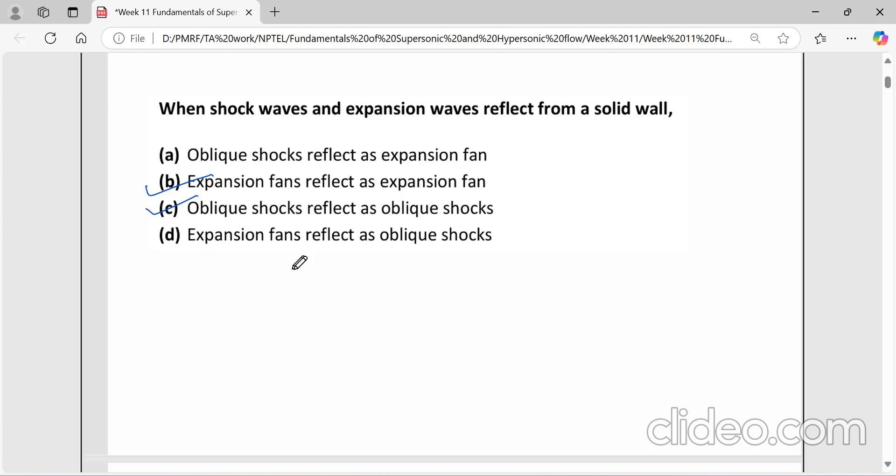So whenever there is one wall and one oblique shock is reflecting, then it will reflect as an oblique shock only. Its nature will remain the same. So whatever wave is reflected from the solid wall, its nature will remain the same.

And if an expansion fan is reflecting from a wall, it will remain an expansion fan only. So options B and C are correct.

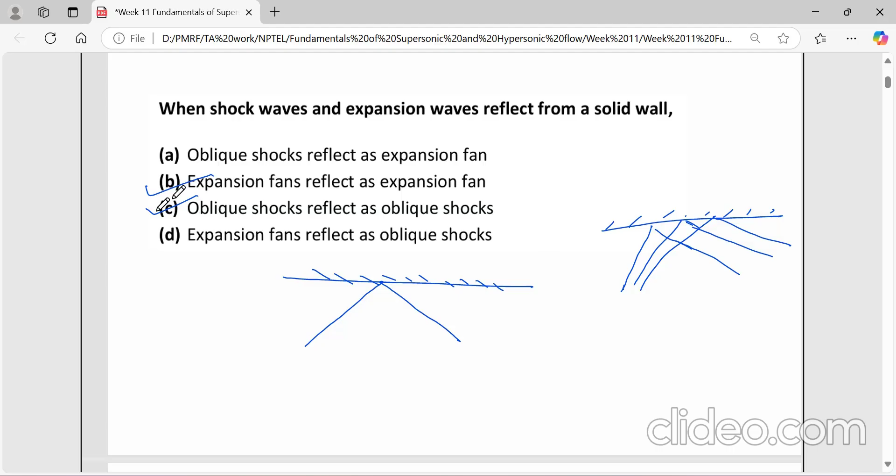Now we will see the next problem. The following statement or statements is or are true in connection with wave reflections from a constant pressure boundary. The previous problem was related to wave reflections from a solid boundary. This problem is related to wave reflections from pressure boundaries. Statement 1: A shock wave reflects as an expansion wave when it meets a constant pressure boundary. Statement 2: An expansion fan reflects as a shock wave when it meets a constant pressure boundary.

Option A, statement 1 true, statement 2 false. Option B, statement 1 false, statement 2 true. Option C, statement 1 true, statement 2 true. Option D, statement 1 false, statement 2 false.

So in this problem we have two statements and we have to tell which one is true and which one is false. In statement 1, a shock wave is reflecting from a constant pressure boundary, and in statement 2, an expansion fan is reflecting from the constant pressure boundary.

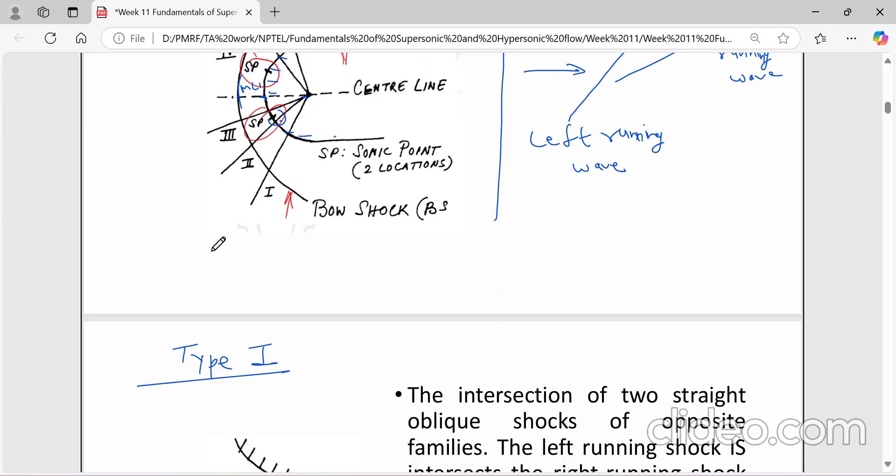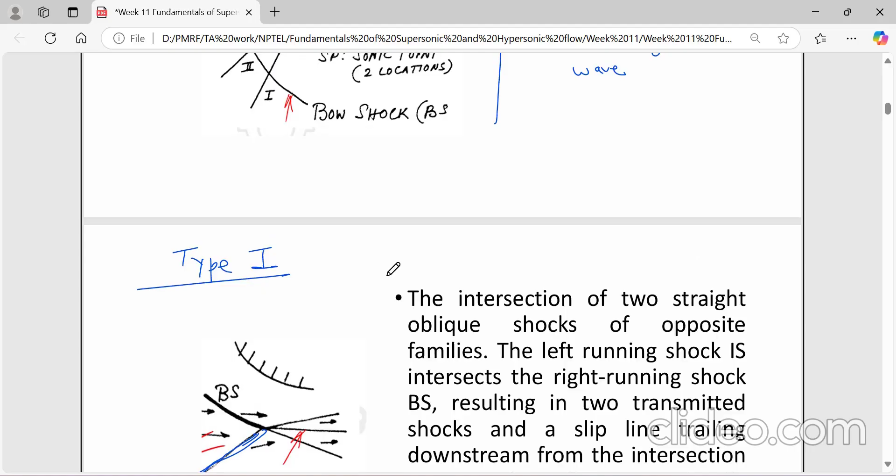If you see this region, this is almost like a right running wave. If an incident shock is interacting with it, it will be a left running wave. So the nature of type 1 interaction is the interaction of two straight oblique shocks which are of opposite family: one is left running wave and another is right running wave. I think this was asked in the question, but we'll first learn all other types, then discuss that problem. So it is an interaction between two straight oblique shocks of opposite family.

The left running shock is IS, the incident shock, and this BS is the bow shock. So this left running IS interacts with the right running BS, and due to this there will be two transmitted shocks, one here and one here, and this will be the slip line between these two. The flow will be supersonic everywhere because these are low strength shocks, so flow will be supersonic everywhere in this type 1 interaction.

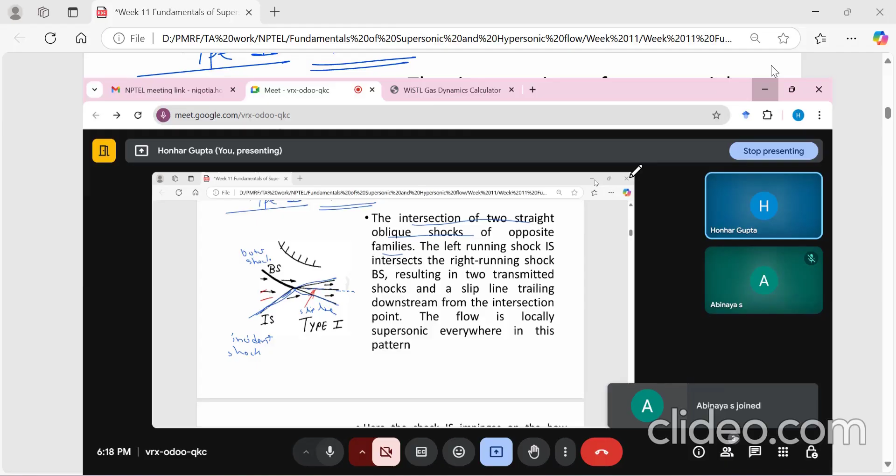Now we will see type 2 interaction.

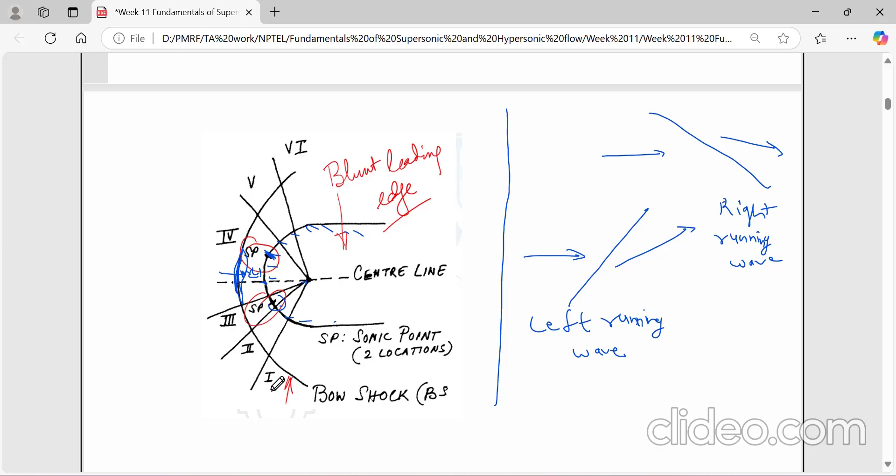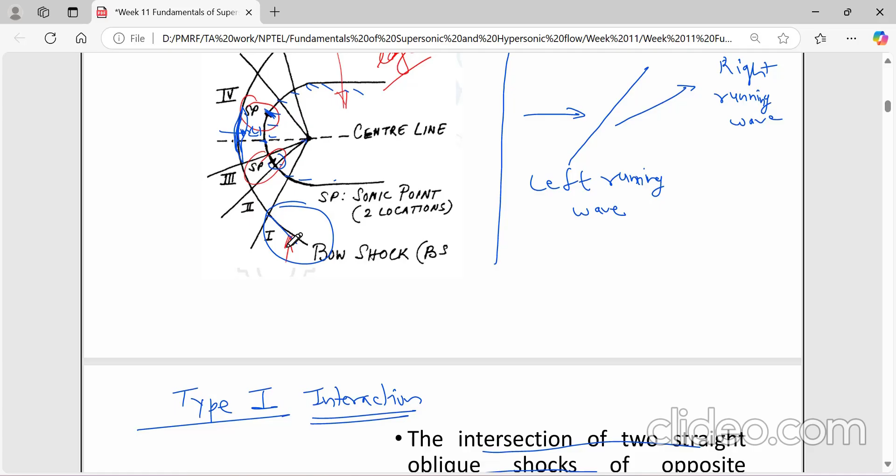Type 1 interaction is the interaction between the right running bow shock and left running incident shock. In this region, the bow shock is right running, almost a straight line with a right running. If there is an incident shock that is left running, both will interact, and the transmitted shock — two shocks will be transmitted — and there will be one slip line. As the strength of this bow shock is very low away from the stagnation point, the flow will be supersonic everywhere. This is the type 1 interaction.

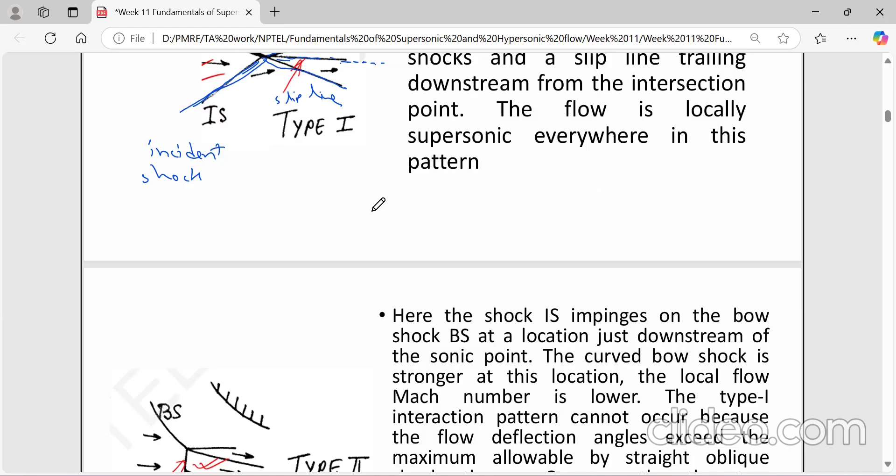Now we will see the type 2 interaction. One thing to note is that in the type 1 interaction, this right turning wave angle was also very small. But in this type 2 interaction, this right turning wave angle is not small, it is bigger, so this bow shock is not almost a straight line, it will be slightly curved.

And this angle is crossing the theta max value for the oblique shock, for which the shock will be a straight line.

So whenever the incident shock impinges on this bow shock, this impingement location is just downstream of the sonic point, just downstream of the sonic point.

This curved bow shock is stronger at this location, and the local flow Mach number is lower. The flow Mach number will be lower, but it will be greater than 1 only. So there will be...

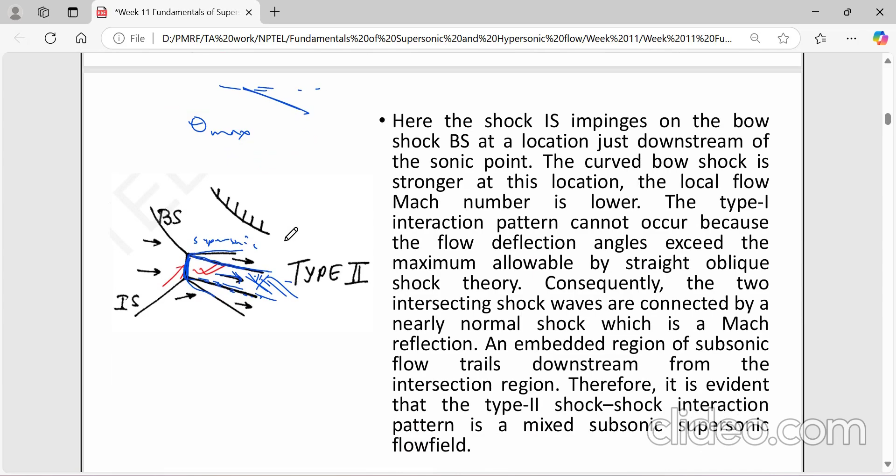So what will happen is that across the bow shock, the flow will be subsonic.

One thing—when these two shocks interact, there will be two transmitted shocks. So the flow behind the bow shock will be subsonic because it is upstream of the sonic point, but the flow behind this transmitted shock will be supersonic.

So this slip line—the flow behind the bow shock is locally subsonic. The flow behind the bow shock is locally subsonic, and the slip line trails downstream from the interaction point and its impingement on the body. The slip line will impinge on the body.

And the slip line separates the locally subsonic flow above it from the locally supersonic flow behind it. So this is the subsonic flow and this is the supersonic flow. The slip line separates them, and after it there will be some complex flow patterns. This is the type 3 interaction.

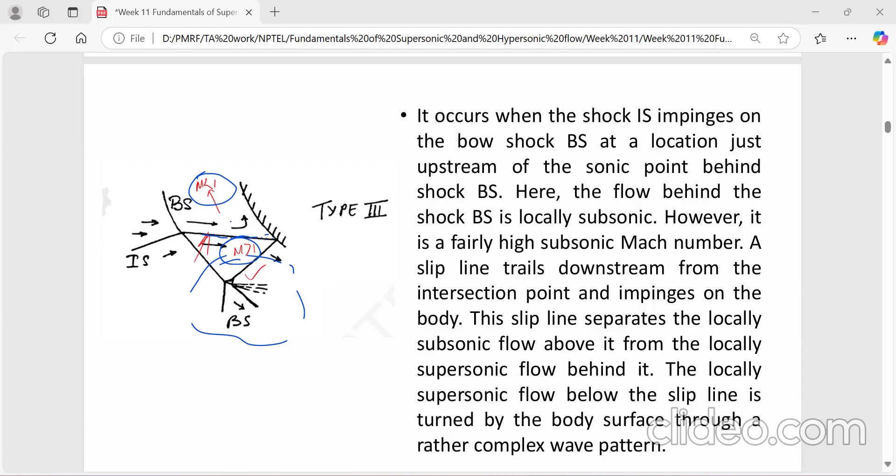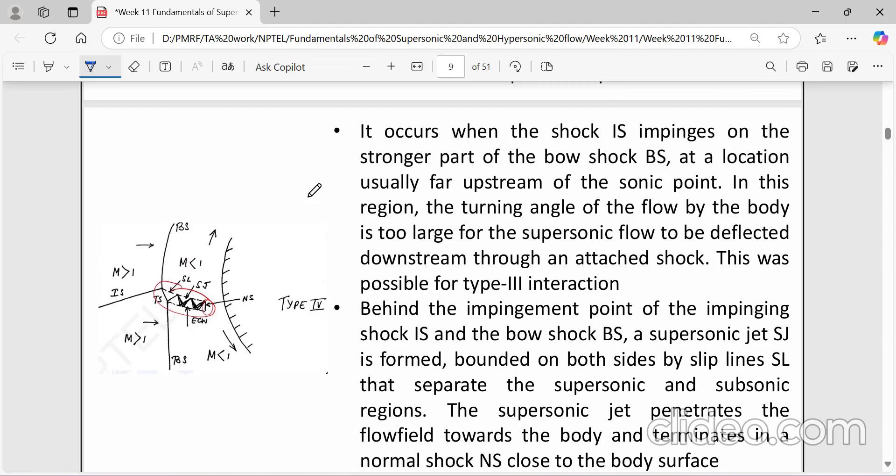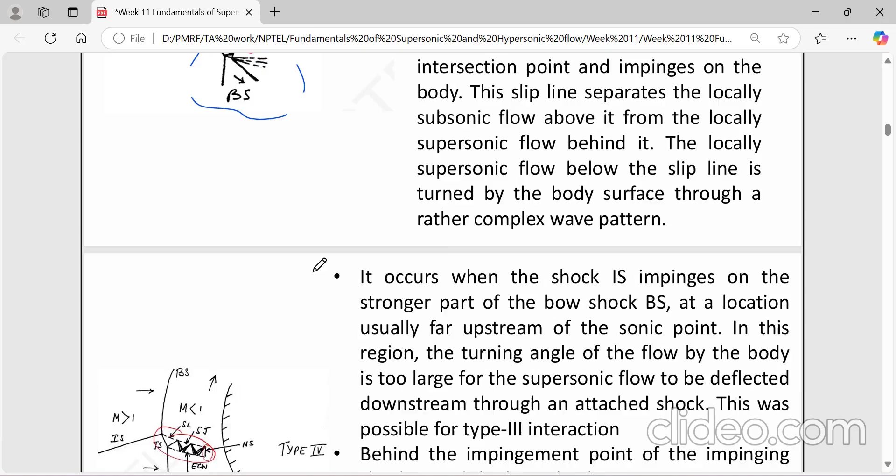Now we will see the type 4 interaction. It occurs when the incident shock impinges on the stronger part of the bow shock, at a location usually far upstream of the sonic point—here, in this region where the bow shock is strong, far upstream of the sonic point.

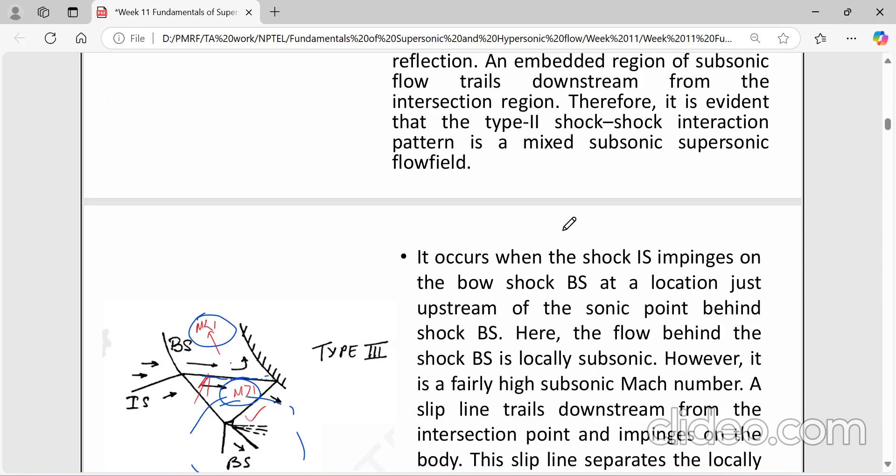And in this region, the turning angle of the flow by the body is too large. This turning angle is too large. If the flow is coming like this, then this turning angle is very large.

For the supersonic flow to be deflected downstream through the attached shock—this was possible for the type 3 interaction.

Behind the impingement point of the impinging shock IS and the bow shock BS, a supersonic jet SJ is formed.

These are bounded by two slip lines. This is a supersonic jet, and these are bounded by two slip lines, and there is...

You can say the series of shock waves and expansion fans are here, and it will go and impinge on the body, and it will terminate by the normal shock close to the body surface.

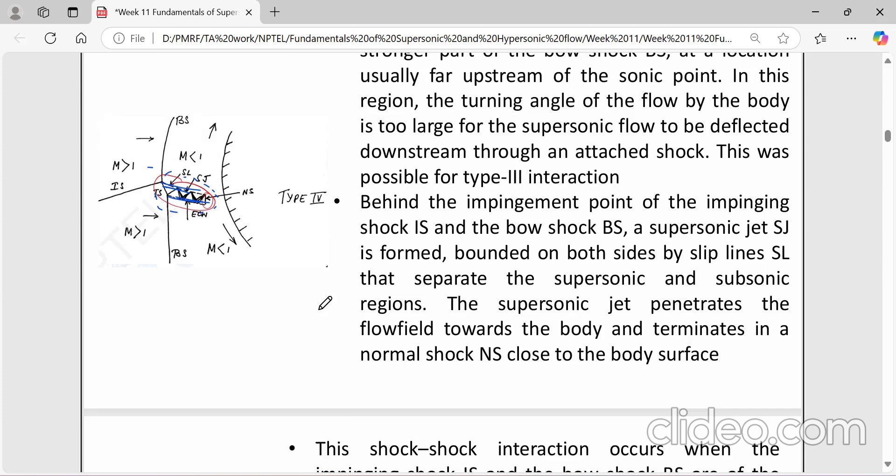And due to this, the pressure will be high, and the heating will be higher than in the case without impingement. And it will also be unsteady in nature.

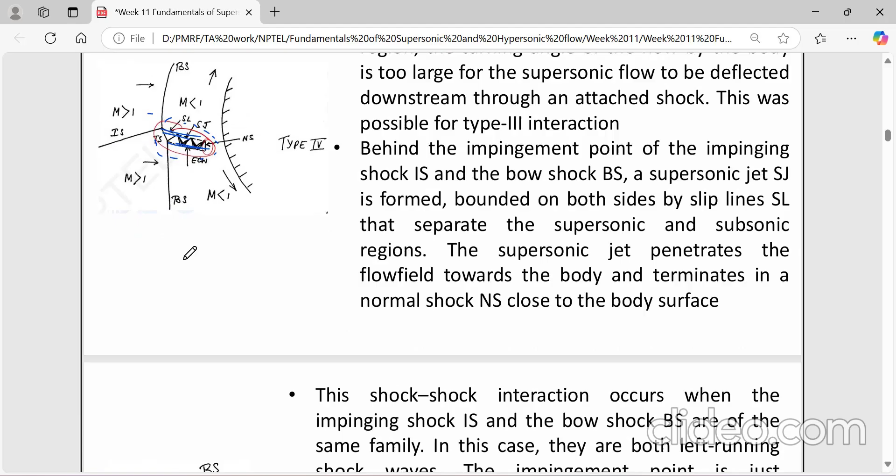Now we will see the type 5 interaction.

So this shock interaction occurs when the impinging shock and bow shock are of the same family.

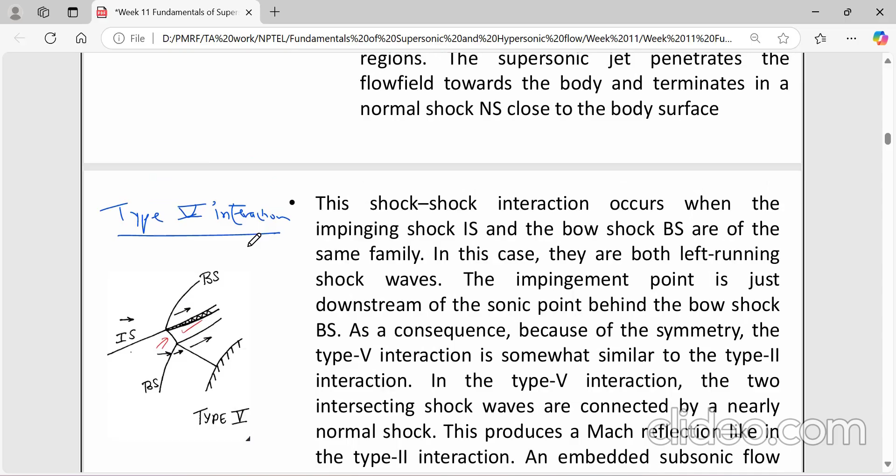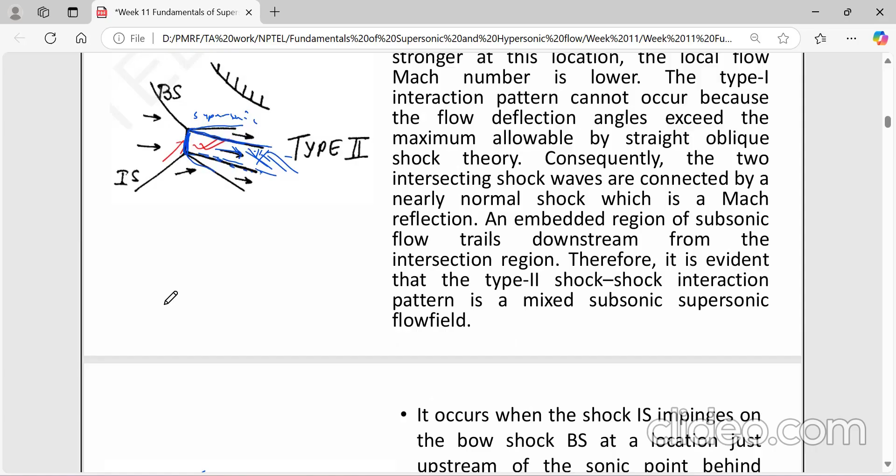If you see the type 5 interaction, it is somewhat similar to type 2, with only a slight difference. In type 2, both the bow and impinging shocks are of different nature, left running and right running. But in type 5, both are left running.

So there will be one Mach reflection, and there will be subsonic flow between the two slip lines. The impinging point is just downstream of the sonic point behind the bow shock, similar to the case of type 2 interaction.

In the type 5 interaction, the two intersecting shock waves are connected by a nearly normal shock. This produces a Mach reflection like type 2 interaction, and an embedded subsonic flow region forms downstream from the intersection region.

So this embedded subsonic region is formed. Both are bounded by one slip line, and on one side there is a very thin supersonic jet, which acts more like a slip line since it is so thin. So this is a type 5 interaction.

Type 6 interaction is also similar to type 1 interaction. This is the type 6 interaction. The only difference is that this interaction involves two left running shock waves, and the impingement point is far downstream from the sonic point. Here you can see this region - it is far downstream from the sonic point.

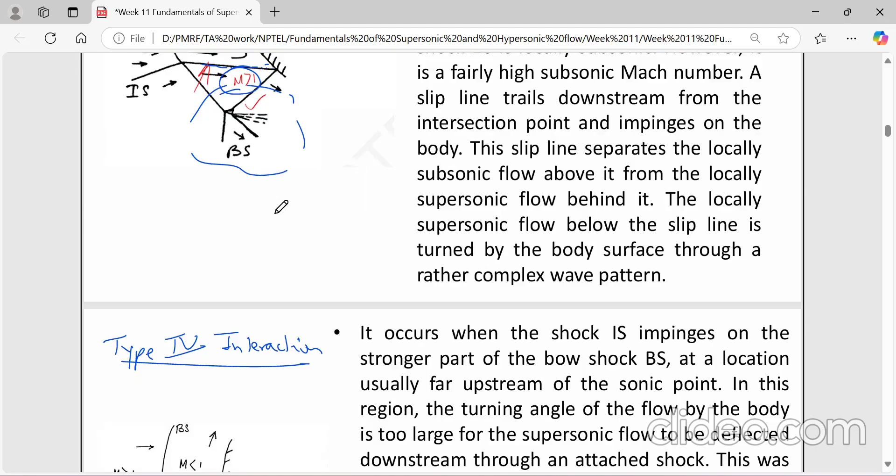This interaction is analogous to type 1 interaction, which I already told you. Here two shock waves of the same family intersect at a point, coalescing into a single transmitted shock and a slip line trailing downstream from the intersecting point, as you can see here.

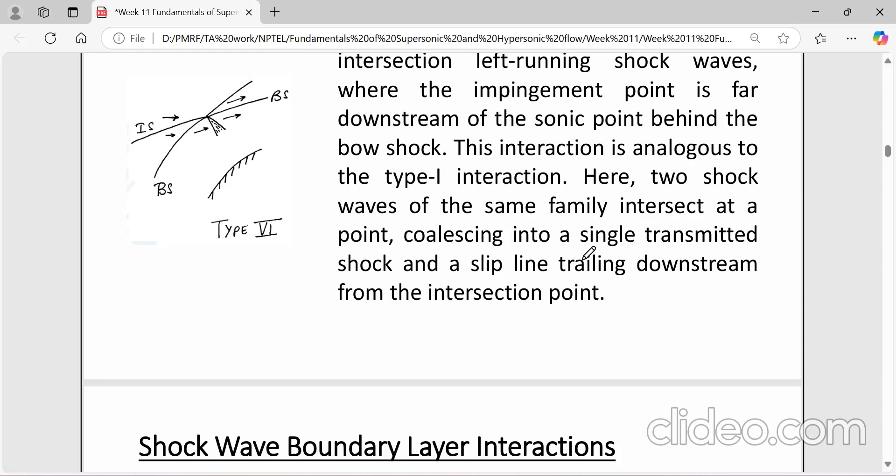So now we have seen all 6 types of interaction. So we will now see the problem which we were discussing before.

Statement 1 was: type 1 interaction involves two shocks of the same family. Is this true or false? It will be false, because the incident shock is left running and the bow shock is right running, so both are of opposite family.

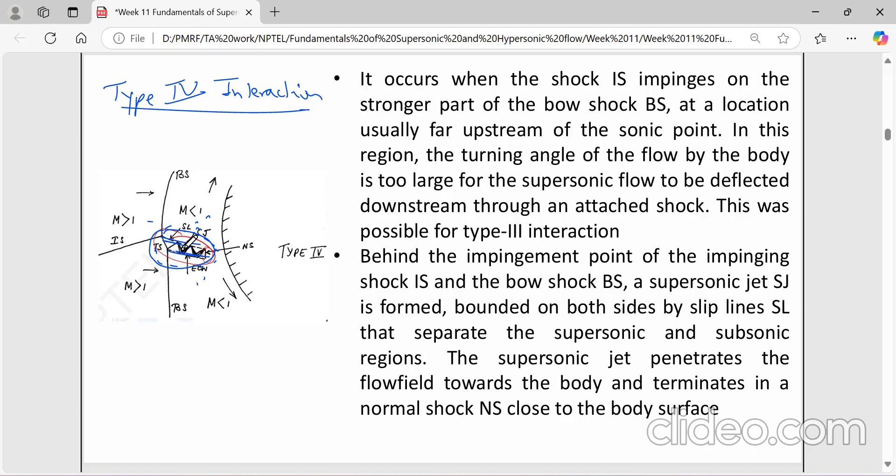Statement 2: Type 4 interaction produces an unsteady supersonic jet impinging on the body. This is true. In type 4, we have seen that it produces an unsteady supersonic jet, surrounded by two subsonic regions, which impinges on the body. So this statement is true.

So which option will be correct? It will be option B.

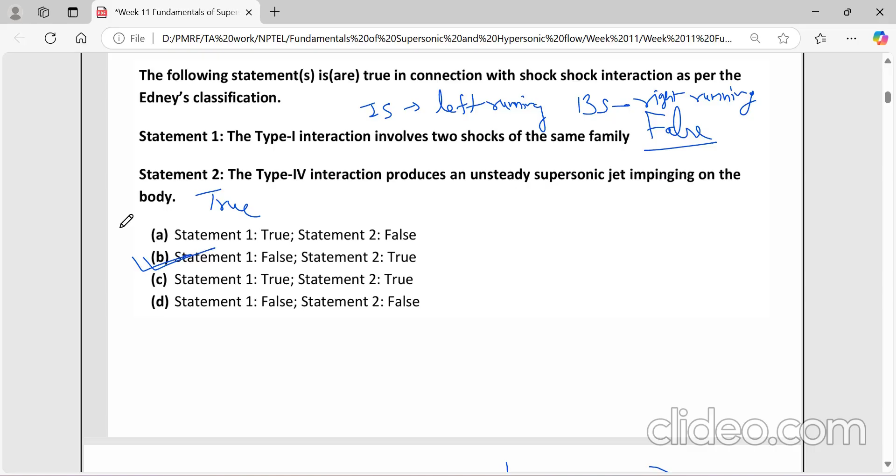So adverse pressure gradient across the incident normal or oblique shock causes the boundary layer to separate on the body surface and forms a flow separation bubble. The flow separation will be there and it will form the bubble.

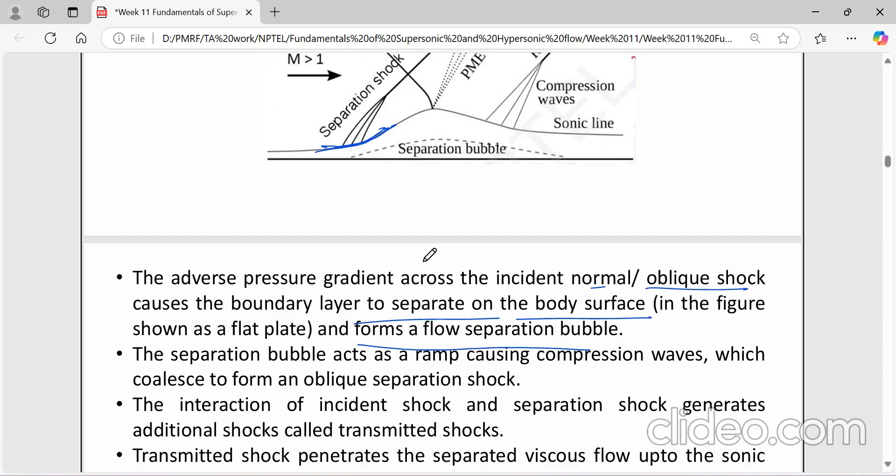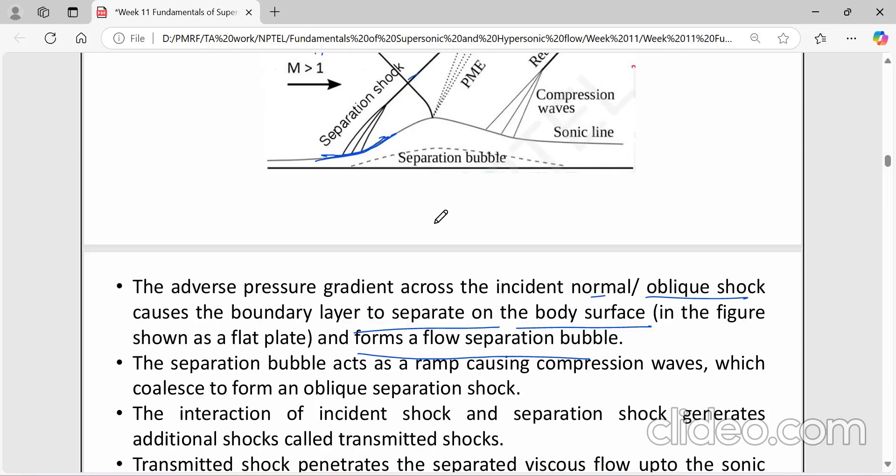So the interaction of this incident shock and the separation shock will create the transmitted shock. And this transmitted shock will penetrate the viscous flow and it will penetrate till this sonic line.

So the shock will go till the sonic line only, and after hitting this sonic line, it will reflect and form a Prandtl-Meyer expansion.

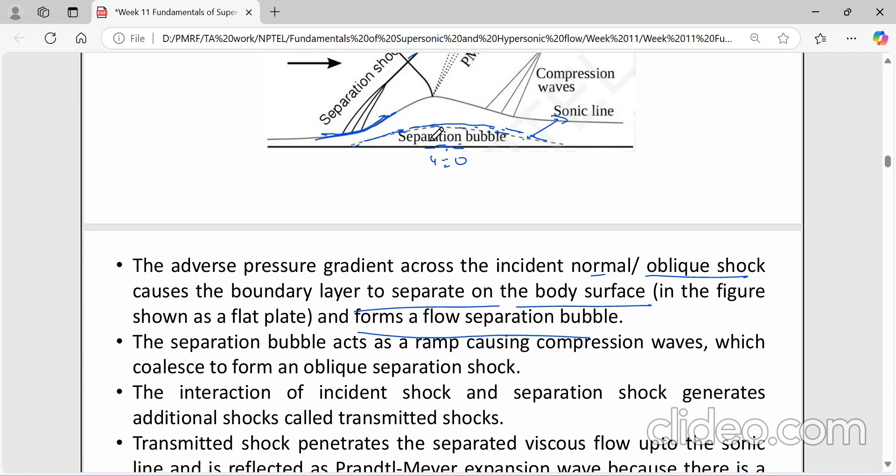And why does the nature of this transmitted shock change? Because there is almost constant pressure in the bubble. So from the constant pressure boundary line, if some wave is reflected from it, then its nature will change. That's why there is Prandtl-Meyer expansion.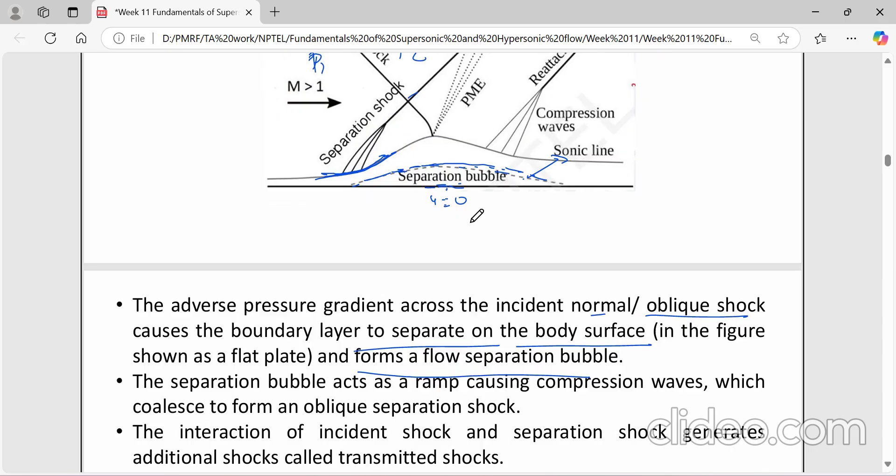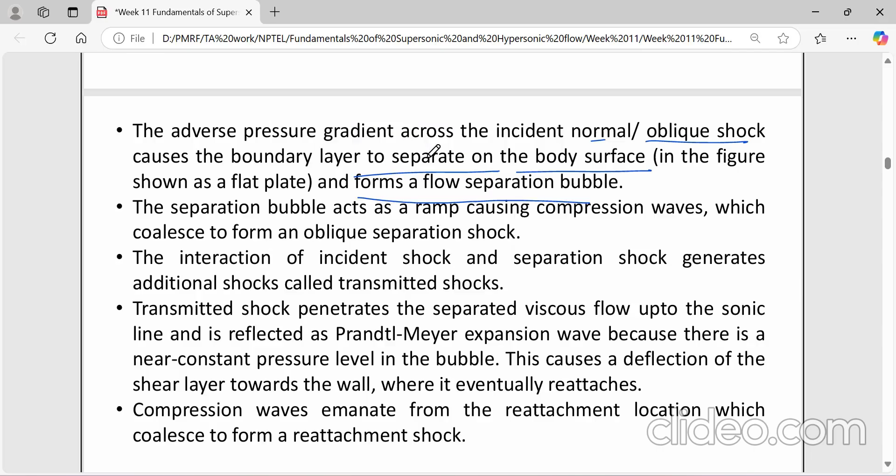So as there is Prandtl-Meyer expansion, it will cause the shear layer to deflect towards the wall. As it moves towards the wall, this bubble will reattach to the wall, and due to this reattachment, there will be a series of compression waves which will coalesce together and form a reattachment shock. This is the shock wave boundary layer interaction on the flat plate.

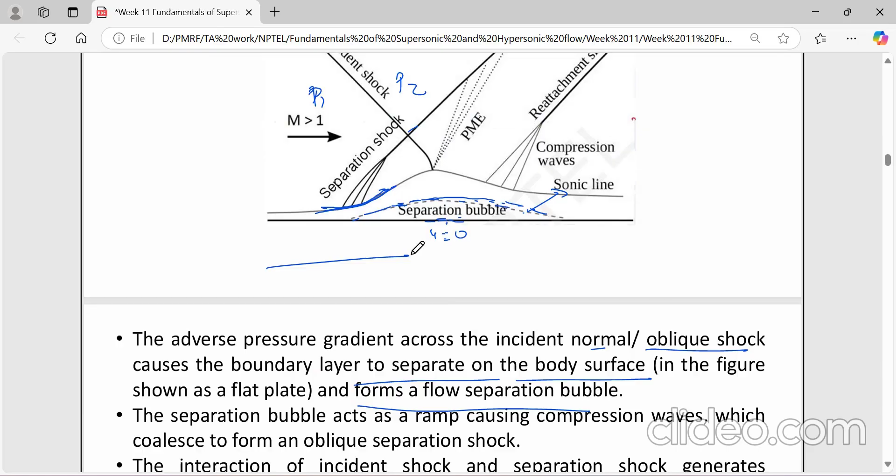Now we will see some test facilities.

This test facility is a shock tube. Generally in a shock tube there are two sections: one is the driver section and one is the driven section. The driver section is filled with high pressure gas, and the driven section is filled with low pressure gas.

Let's say the driver section conditions are denoted by number 4: pressure P4, temperature T4, mu4, A4, gamma4, and molecular weight M4. For the low pressure section, its pressure and temperature are P1, T1, mu1, A1, gamma1, and the molecular weight of the gas is M1.

Both sections are separated by one diaphragm. So initially the pressure will be like this. This is the distance x. In the driver section, constant pressure P4, and in the driven section, constant pressure P1, and there will be a pressure difference.

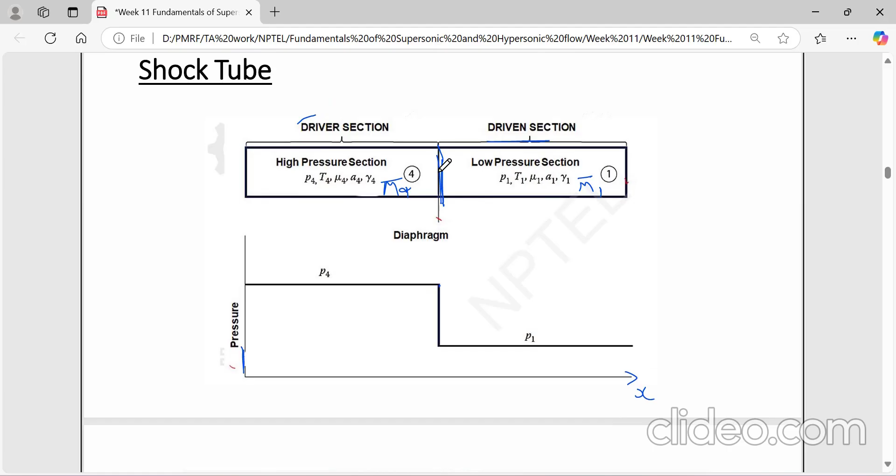Now, when this diaphragm bursts - and this diaphragm can be burst in many ways - what will happen? One normal shock will move towards the low pressure section, meaning the driven section, and one expansion wave will move towards the high pressure section.

Why will it happen? Because there is a pressure difference here, so it will try to make both pressures equal. The lower pressure will be made higher, and the higher pressure will be made lower. Pressure can be increased only by a shock wave, and pressure can be decreased by an expansion wave. That's why in the driver section, an expansion fan will move, and in the driven section, a shock wave will move.

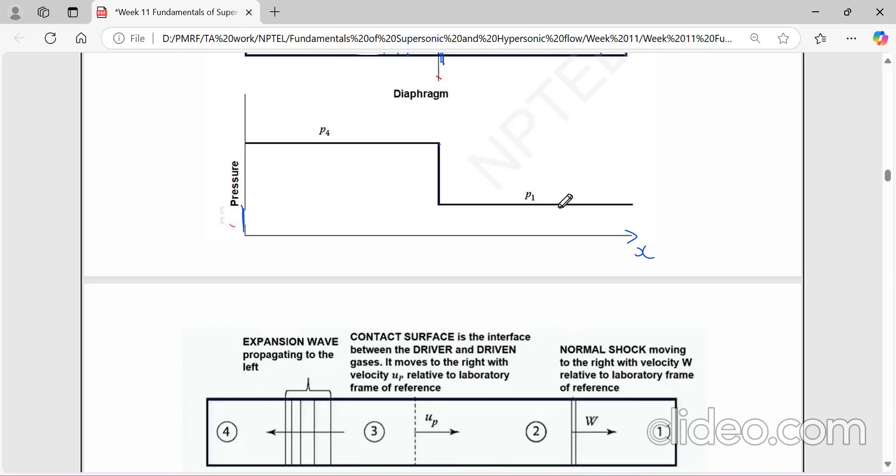So one normal shock wave is moving to the right with velocity W relative to the laboratory frame of reference, and the expansion fan is propagating to the left. The initial condition is 1 for the driven section and 4 for the driver section. But behind this shock wave the condition is 2, a different condition, and behind the expansion fan the condition is 3.

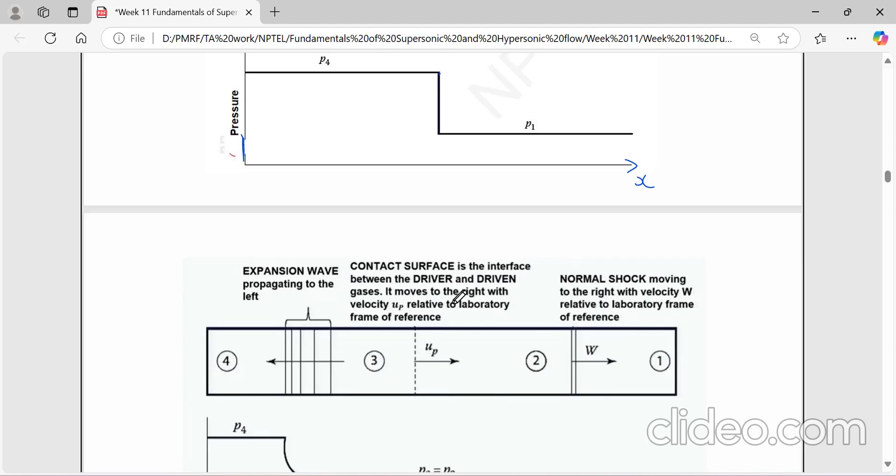These two conditions are different because both gases are also different. That's why 2 and 3 are different. There will be a contact surface, which is the interface between the driver and driven gas, and it moves to the right with velocity u2, relative to the laboratory frame of reference.

So what will happen? If you see, this is x, the distance along the length of the shock tube, and this is the pressure. The pressure at the contact surface will be the same - the condition at the contact surface is such that region 2 and region 3 will have the same pressure, and the velocity of region 2 and 3 will also be the same.

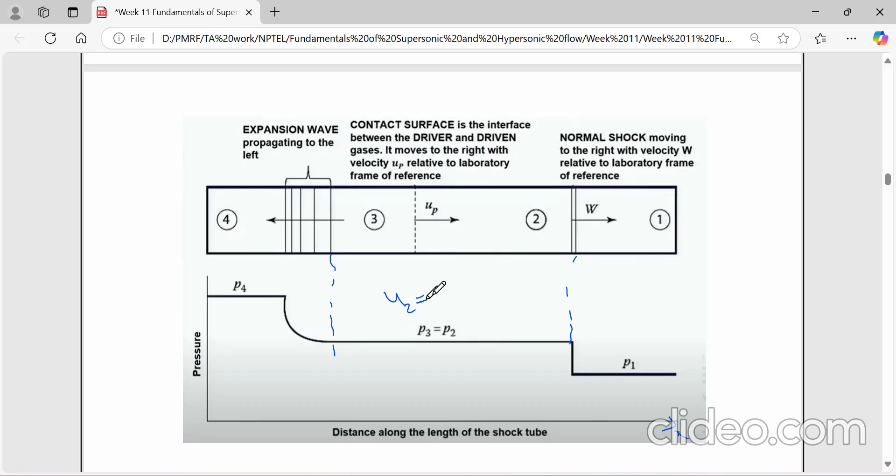So it will have constant pressure from this region to this region, P3 equal to P2, and this region will have pressure P1, and this region will have pressure P4. Due to the expansion fan, there will be a gradual change in pressure here, but due to the shock wave, this pressure change will be abrupt. So as this shock wave moves, pressure P1 will become P2, and as this expansion fan moves, pressure P4 will become P3.

I will make one x-t diagram also. But with time, what is happening? Let's see, initially the diaphragm was here. This is x... sorry, this is time t, this is x.

Initially the pressure here was P1 - this condition is 1, this is 4 initially. So when the diaphragm bursts, one shock wave will move. The shock wave velocity is constant, that's why you can see that with time, the shock wave will move in the right direction. So the shock wave is moving in the right direction, and the expansion fan will move in the left direction.

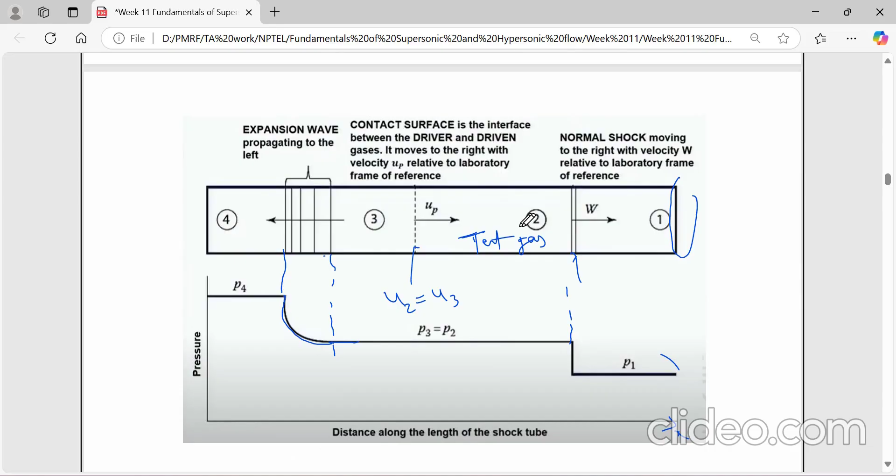And after this, the region between this and this can be taken as test gas, and what happens with this test gas is measured. So this 2 is the test gas. And 2 and 1 are the same gas, so you can say that 1 and 2 have the same molecular weight.

So generally this test gas is air only, atmosphere. So M1 we cannot change, gamma 1 we cannot change. Only thing we can change is gamma 4, T1, M4 and T4.

And M4 bar is nothing but molecular weight of the driver gas. So if we have a low molecular weight gas in the driver, it will have lower value of A1 by A4. That's why generally we use helium or hydrogen as a driver gas, as it is very hazardous to use hydrogen because it reacts with oxygen very easily. That's why generally helium is used.

We can also increase T4. If we increase T4, then A1 by A4 will also be smaller. That's why generally driver gas is preheated before using. This is the working of the shock tube.

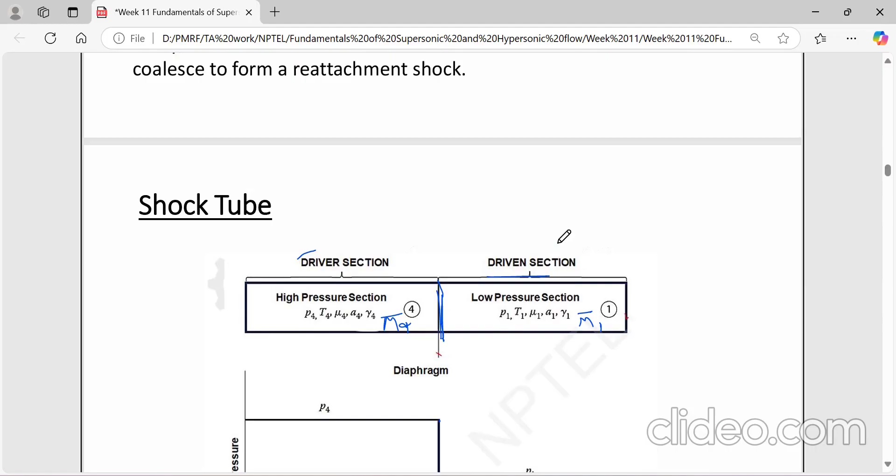Now we will see the reflected shock tube. In the shock tube, this end was open, so this shock wave did not reflect. But let's say this end is a wall. Then what will happen? This shock wave will come and hit the wall. But let's say this shock wave, when it's vanishing after hitting the wall...

And what will happen? There will be some velocity at the wall also. And when this shock wave reaches here, there will be some flow velocity at the wall also, which is not possible, because at the wall this velocity should be 0. That's why the shock wave will reflect. So when the shock wave reflects, the velocity behind the shock wave will be 0.

And this condition is named 5. And it will create the stagnation region here. You will get some stagnation gas, and this gas can be used...

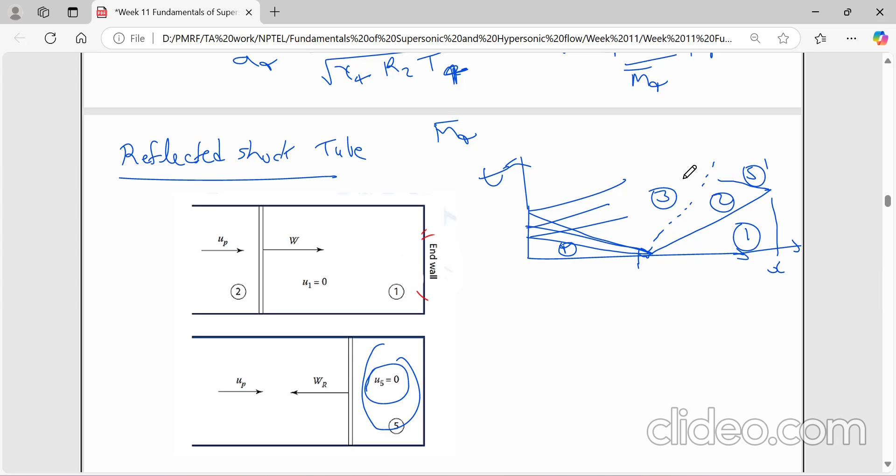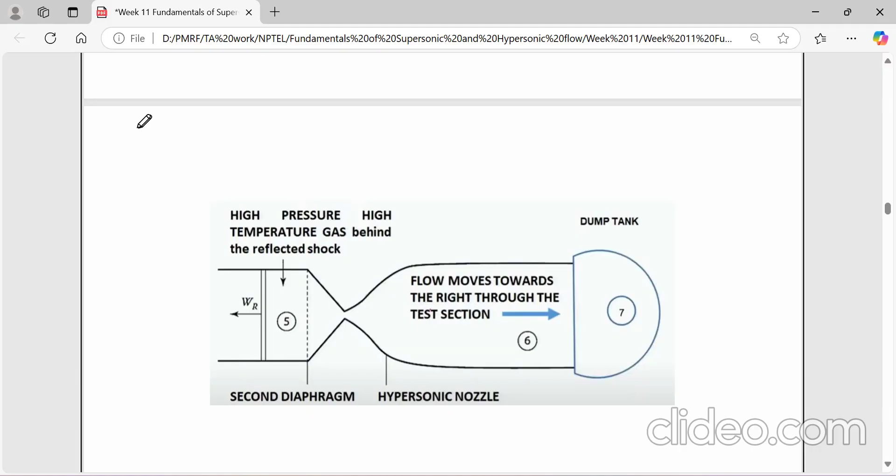In this case, our test gas will be in region 5. For utilizing this gas, we use one nozzle and one secondary diaphragm, so that this gas can be expanded further. This is called reflected shock tunnel.

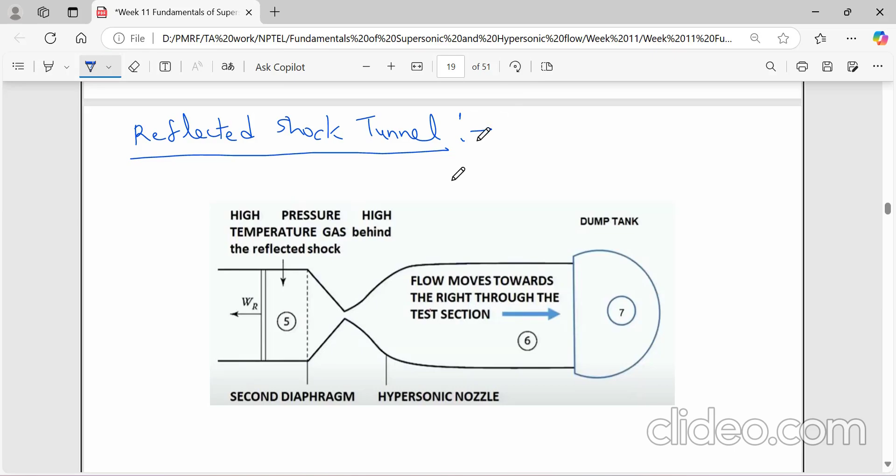In the reflected shock tunnel, at this end wall, we use another secondary diaphragm, and after that we use the nozzle, and after that there will be one test section and one dump tank. So what will happen is that just behind the reflected shock wave there will be high pressure, high temperature gas.

Due to this high temperature and high pressure gas, the secondary diaphragm will burst. And when this secondary diaphragm bursts, the high pressure and temperature gas will be expanded through this nozzle. This expanded gas will be used as a test gas in the test section. This is the working principle of reflected shock tunnel.

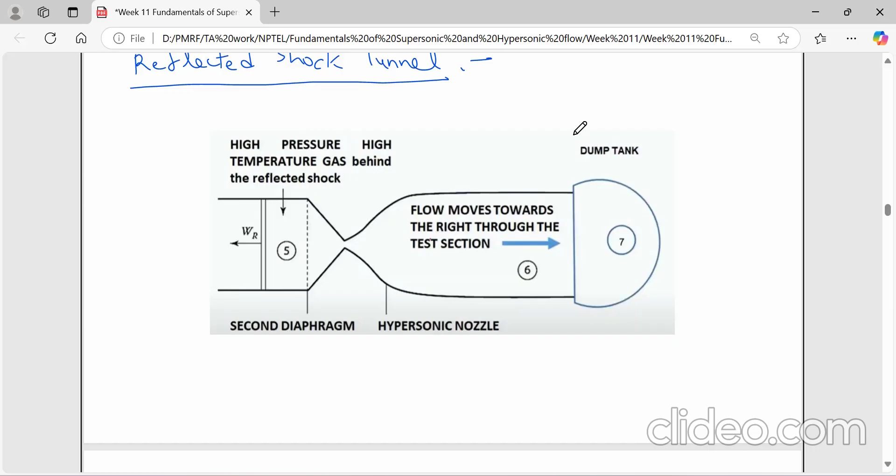One thing I told you before is that we can heat the driver gas also. For heating the driver gas, there are different ways. One of the ways is combustion type, where the driver gas is combusted. Another is electric arc type.

So different types of shock tubes are made: combustion type shock tube, electric arc type, and one is the free piston type. In free piston type, the driver gas is compressed by a piston, so the compressed gas will have high pressure and temperature. That high pressure and temperature gas will be used for bursting the diaphragm.

There is also the conventional type. In conventional type, we don't heat the gas, we directly fill the high pressure gas and it will be used for bursting the diaphragm. And there is also one detonation type, where we use the detonation wave to heat the gas.

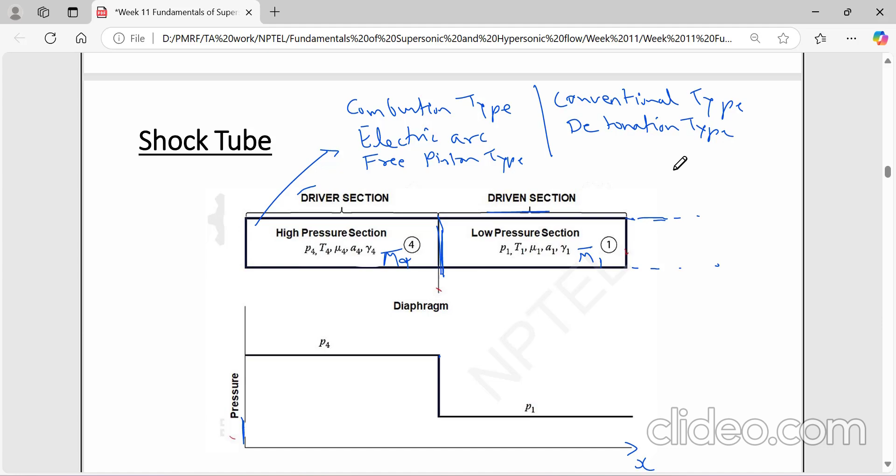As it was not in the course, I am not telling you more about that. One thing now we will see is the pressure deflection diagram.

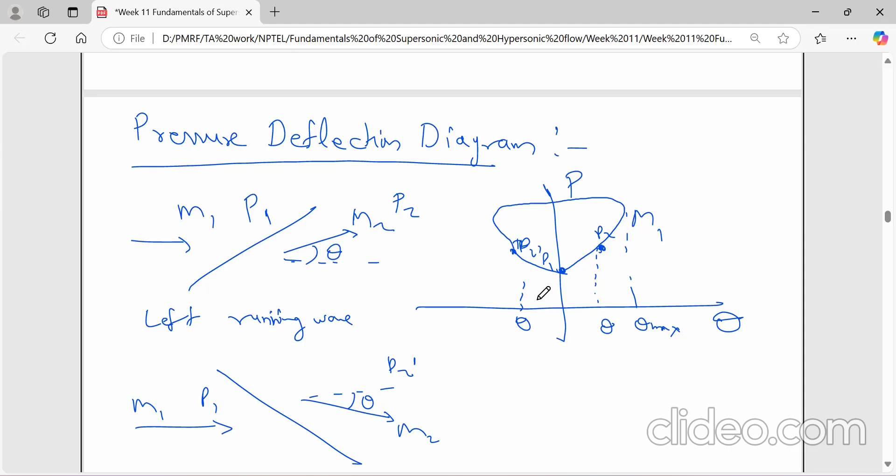One example we will see: this is angle theta1, and this is angle theta2. There will be one oblique shock here and one oblique shock here. Both will interact.

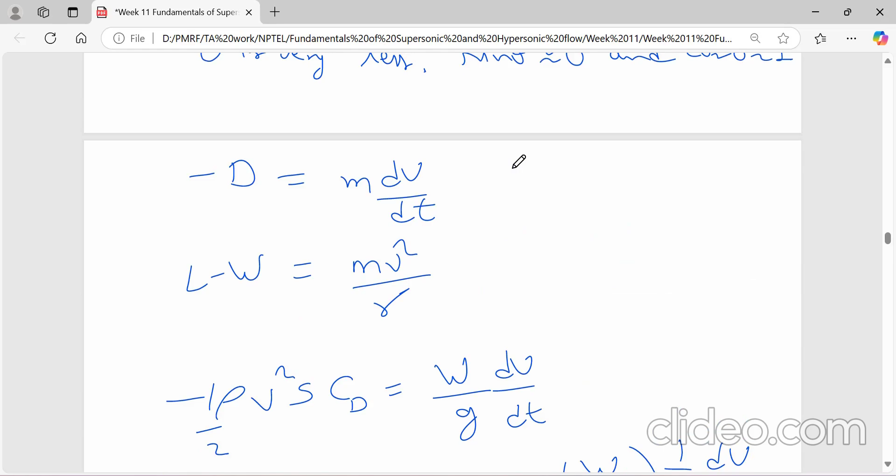In the class, it was also taught about the hypersonic wind tunnel facilities, and these hypersonic wind tunnel facilities generally depend on the nozzle. At what Mach number nozzle you want to use, accordingly it should be made.